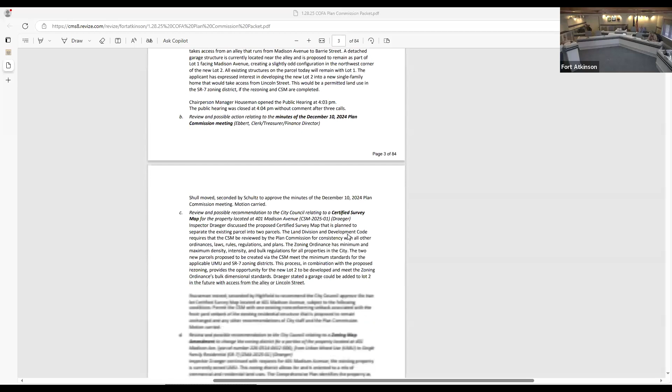Thank you. Yeah, this one's pretty straightforward. It's a new building sign on the front of the building on 1550 Madison Avenue. As you know, that also has the Subway and Pizza Hut in it. Riedl and Son moved in there for some office spaces, and this is an approval for a new building sign and a replacement sign for the front of the pylon sign replacement panel there.

I will apologize, down in the recommendation it did say monument sign. That is not part of this approval here. There's no monument sign, but it is meeting all the requirements for the city's ordinances. It is an internally lit LED sign.

Thank you for that, that's helpful to see. But like I said, it does meet all the ordinances for signs. It is internally lit LED lighting. As you can see on the building there, it's relatively similar in size to the other signs on the building, just a little different design to fit their logo. And once again, the panel replacement is fitting the same size as what's already existing in that pylon sign along Madison Avenue.

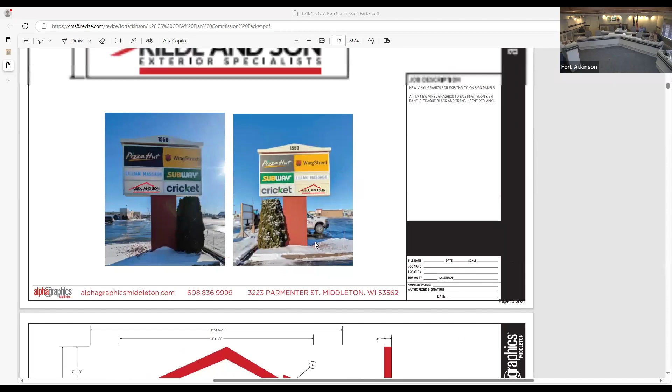City does recommend approval of the signage as it is proposed. I'll welcome any questions. Like I said, it's a pretty straightforward sign.

It meets all ordinances. Does the wall sign, is that internally lit? Yes. Okay, so that is lit, it's red and black, correct. That was going to be my question too. And then the panel sign, obviously that's internally lit, just like all the panels. Correct, yep. That'll just be the actual plastic piece over the top that's being replaced on both sides of that pylon sign.

Okay, any questions for Mr. Draeger from the Plan Commission? I will say it is nice to see this building getting filled. We've had a few approvals come through with this building, as well as the one on Lexington, on the corner of Lexington and Madison, getting filled up, which is nice to see. Yeah, it's great to see these spaces housing businesses here in Fort Atkinson.

So the staff recommendation is to approve the wall sign and what do we call that, a tenant panel sign? Correct. Yep, wall sign and tenant panel sign as proposed by the applicant. Is there a motion to that extent? I will move to approve. Second. Okay, we have a motion, a second. Any discussion by the Plan Commission?

You said they're just expanding, they needed some more office space. Yes, yeah, they did move their offices over there. They actually constructed 2 new offices and a portion of it, along with some existing offices inside, which they got all their building permits and everything necessary for that. I do believe they're retaining their site over on Oak Street as well, where they're also located. But so this will be an expansion, as far as I understand. Oh, I mean, good for them. It's great to see a local business being vibrant, healthy, expanding.

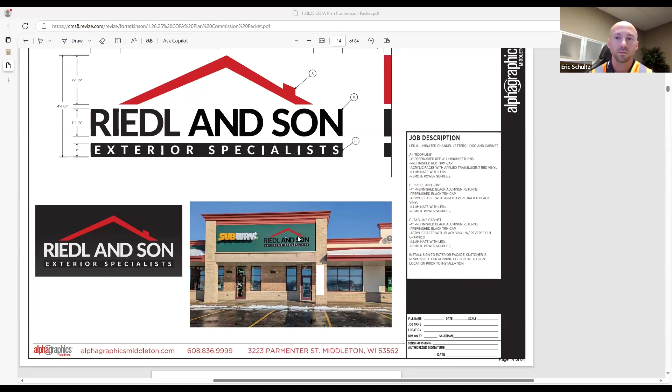Absolutely. Okay, we have a motion and a second on the floor to approve the 2 signs as submitted. All those in favor, please signify by saying aye. Aye. Any opposed? Okay, that motion carries 4-0. Thank you.

Next on the agenda, we have review and possible recommendation to the city council relating to the Ridge View Estates preliminary plat, formerly known as the Banker Road property. This is preliminary plat review 2025-01. Mr. Draeger.

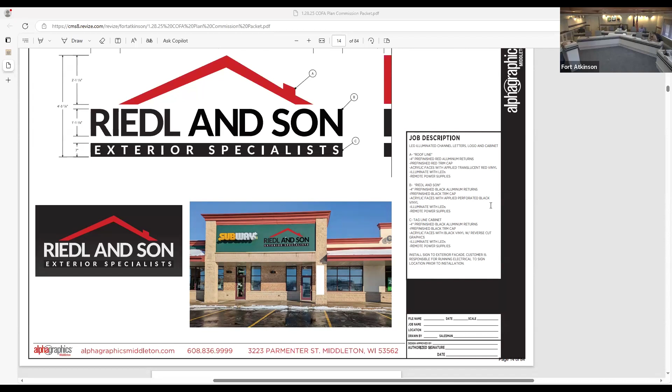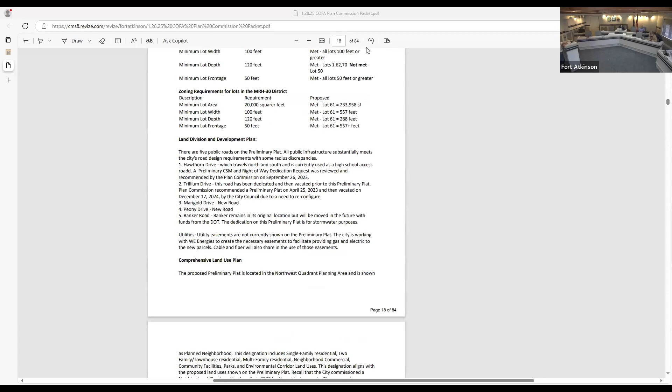Yes, this is a fairly exciting thing to bring forward here. Something I believe everybody involved has been working hard on, getting this to move along with Ridge View Estates up there on Banker Road, next to the high school.

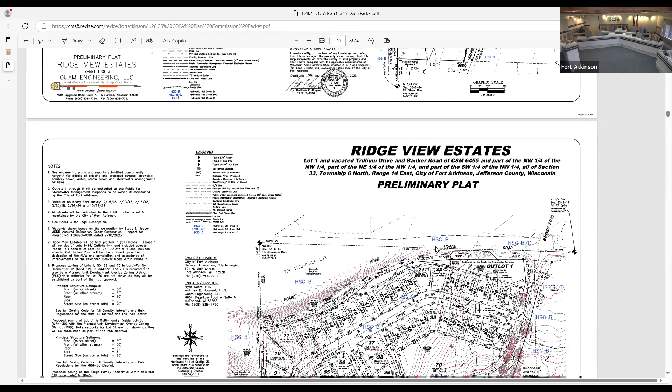As you can see here, there are several new roads currently under construction, as well as 71 single-family lots, as well as some MRM 12 lots, which would accommodate up to I believe 20 units per acre. Most of them are right around an acre, if not a little more, give or take, depending on where this one is located.

And then there's also an MRH 30 lot on the south side of Trillium. We've seen that road a few times in here, which is directly east of the high school. That is the L-shaped lot, which has an outlot to the southwest of it. That outlot is providing stormwater control and management for the bulk of the neighborhood to the north. There are several other outlots that would also be doing the same, helping control stormwater for the area.

One of the notes here is we do not see the utilities and easements for those yet. Those are still under negotiation with We Energies and design for some of the city-owned facilities, in regards to grading and things like that, which sometimes change depending on the quality of the soils we're running into. But the general layout is here.

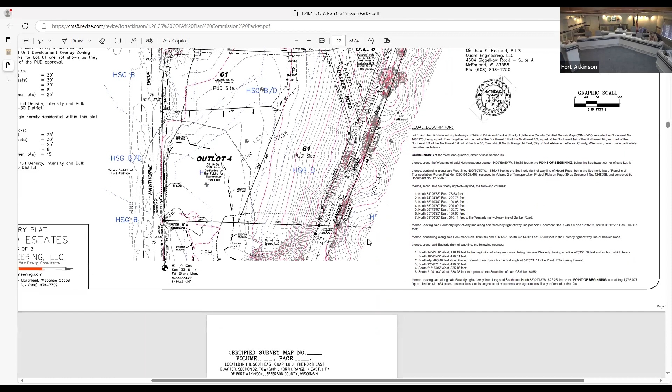That Banker Road, you'll see that kind of does that S pattern there, or Z. That is not necessarily the ending point, and they'll come before this Plan Commission again for the final road plans. That is put in there for stormwater easement and planning for this subdivision, which is why that's laid out in there.

As far as that goes, like I said, there is one lot in particular that does not meet our zoning ordinances. That would be lot 50, I believe, in regards to depth of the lot. So you'll see outlot 2 there, just to the north of it, that wraps around kind of parallel to Peony Drive.

Peony Place, there we go, third try. But anyway, parallel with that, I believe staff would recommend that we place easements for that outlot rather than have a separate outlot, so that we can put forward lots that meet our zoning ordinances as far as depth and pretty much all the general requirements for the particular zoning we'd be asking for.

Also, a note here is you'll see PUD listed on a few of those lots, whereas that's an approval that goes through Plan Commission, City Council, and several different aspects regarding the general development plan and a specific implementation plan. Those would have to come forward through the city approvals process before they could be labeled that.

They should be labeled as their underlying zoning, which is a requirement for the PUD process, that you start with an underlying zoning and the PUD is a variation from that. So that would be another recommendation, that those get corrected. Other than that, everything here is for the most part meeting the city's requirements.

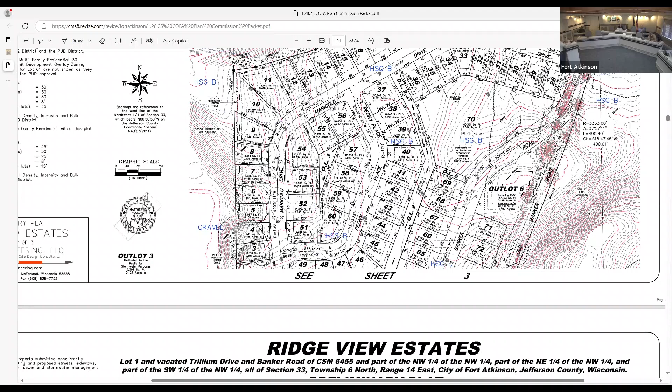Public rights of way are meeting the land development ordinance as well, required easements and those. So other than a few recommendations which we have there, which I'll list off here, so we all know what we came up with through review.

So city staff would recommend the Plan Commission recommend to the City Council approve the preliminary plat with the conditions that I will state here. The PUD lots should be labeled with the individual lot's base zoning. Outlot 2 should be eliminated and replaced with stormwater easements, bringing all proposed lots into conformity with respect to dimensions. Outlot 3 should be eliminated to accommodate changes in road grading per the design engineer.

Utility easements to be shown on the final plat. Set all collector street radiuses to city standards. Outlots should be described and labeled as conservancy on the final plat.

And that would be along the same lines as the PUD comment I made, that should be labeled appropriately for our zoning. And then the comment made there about the radiuses, there are a couple road radiuses that do not quite meet our requirements, and so those should be adjusted to meet the city's ordinances. But other than that, I'd welcome any questions or comments on this.

Jed, can you talk a little bit about, so we're looking at this preliminary plat now, your staff is asking the Plan Commission to approve it, subject to the conditions you just outlined. But we're going to see some of these lots again before this preliminary plat is approved, through a certified survey map process.

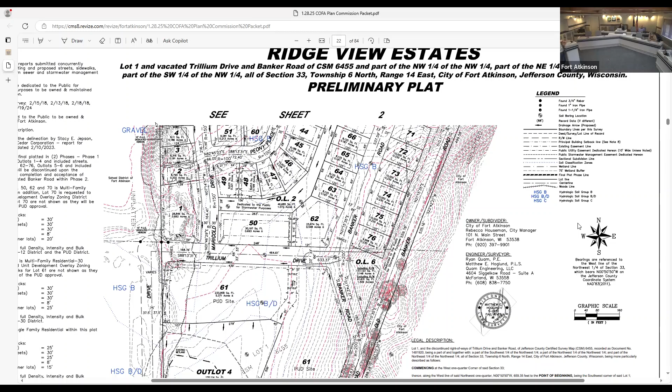What's nice about this is it allows the process with the preliminary plat to be reviewed a few different times to make sure we're getting it right. The CSMs do allow us to move some approvals forward, but they're more of a microscope, allowing the designers and everybody to get the rest of the preliminary plat set the way it should be.

Can you tell us about outlot 6? Yes, outlot 6 is more stormwater retention. That wraps around behind those lots along Banker Road, or the proposed future Banker Road, on the east side. It does connect all the way to the south if you move down to the lower part of the map.

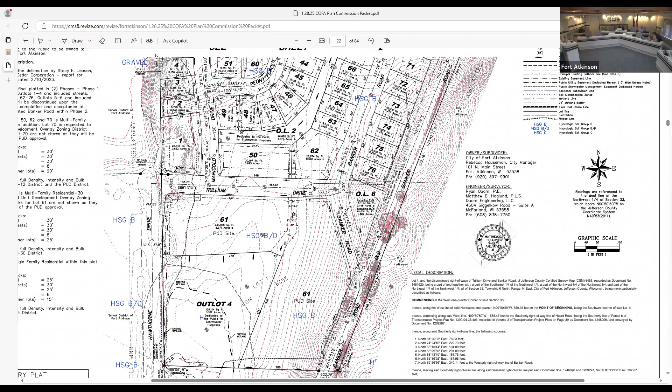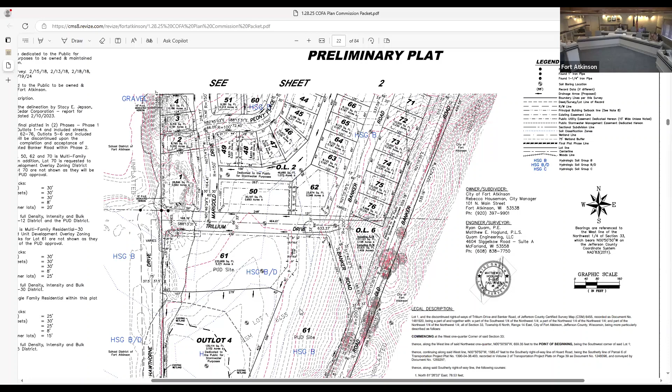Jed, just so I'm clear, you said 71 single-family lots, and then there are lot 61 and lot 70? So 61 is the only one that has that high density multifamily. We don't know at this point how many units they're going to try to put there? That's later on the agenda, we do have that. We have a couple concept plans coming forward, one for this one and one for an additional lot. And lots 50, 62, and 70 are also multifamily? Yes, those are the underlying MR-12, so it's a higher density than single family but not as dense as the MR-30. We'll see the product in the concept plan for what they're proposing for lot 61.

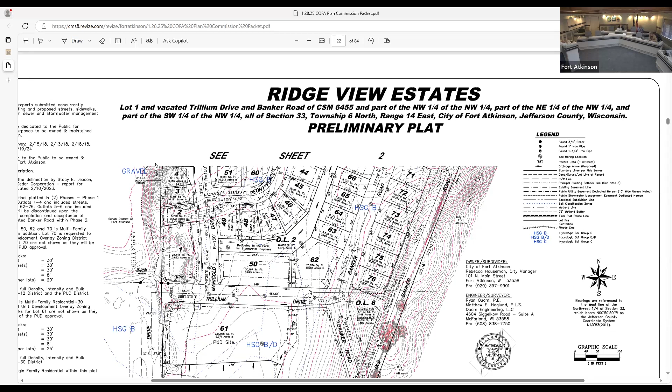Questions for Mr. Draeger from the Plan Commission? Yes, I have one question. I was just curious, you mentioned the radius of the collector streets. Did you touch on that? Is it too shallow or too steep, and where are the issues on the map?

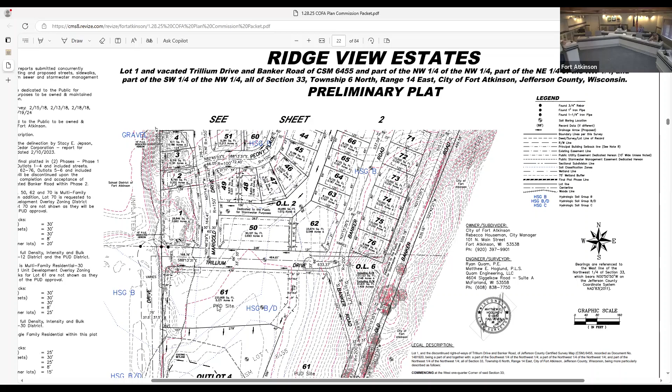I believe the radius is too tight. It's the relocation of Banker Road there, those two curves, and I believe they're too tight. It's a collector and the DOT is now engaged heavily because of their grant, which we're very appreciative to have, but it changes the standards for the road, so we'll have to accommodate Banker Road. Let me see if I can find it, I believe it's this section, and also where it redirects back onto the original, and this section. I believe those are the two.

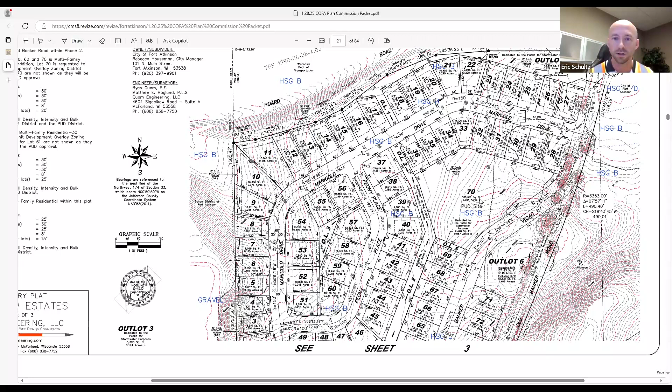Just out of curiosity and learning on my part, I would assume collector streets can sometimes have higher speed limits, and that's why they'd want a more gradual radius, or is that the thought behind it? I can't speak for the DOT, but I don't think it will be more than 25 miles an hour on Banker Road. It's going to be an urban cross section with a 66-foot right of way, as you can see on this map, and there will be sidewalk, which actually isn't shown on the plat, which probably should be, and bike lanes or whatever ends up becoming part of that road. I would not anticipate it being a high-speed collector, just a collector for the side roads in this neighborhood.

I believe the standards may have to do with the possibility of higher speeds, but I don't believe that's something the city would be looking at for there, or it could be about the volume of traffic coming through as it being a collector. All right, thank you.

Questions from other Plan Commission members? Sorry, you just made a comment on sidewalk, is that something we're going to make a note of within one of the actions at the meeting tonight, so we didn't overlook it? I think we need to look at our subdivision code to see if that's required to be on the plat, but because the Plan Commission will be looking at this plat a couple more times, I feel comfortable not adding that as a condition at this time. That should be included in that public right of way width as part of that width.

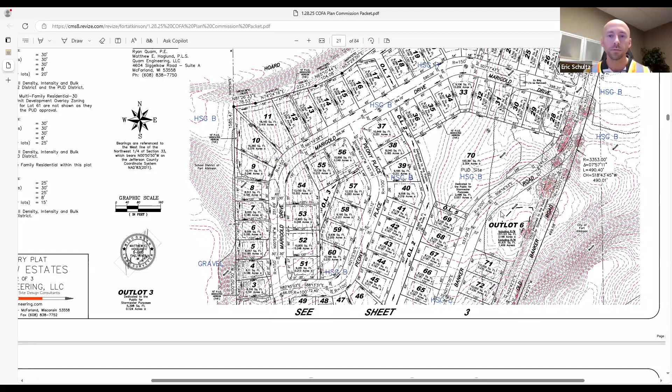Yeah, just one other comment. The SR5 zoning, which is primarily what the single family is proposed to be zoned, is one of our higher density zonings as well. It's not great expansive lots, it's more consolidated. And the zoning for lot 61, is that the high density? Will that allow for mixed use? No, this is just residential.

Okay, we do have a motion and a second on the floor. I would call the question. All those in favor, please signify by saying aye. Aye. Aye. Aye. Any opposed? Okay, that motion carries. Thank you.

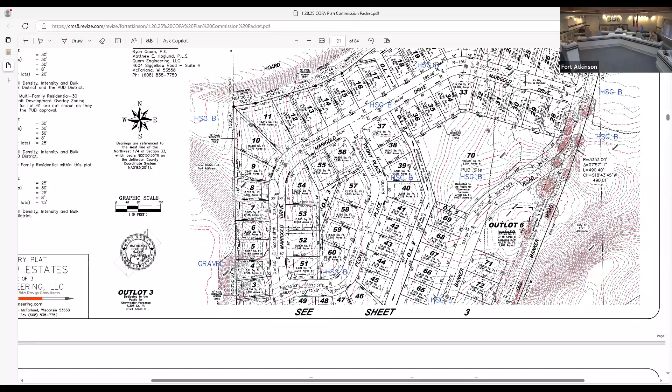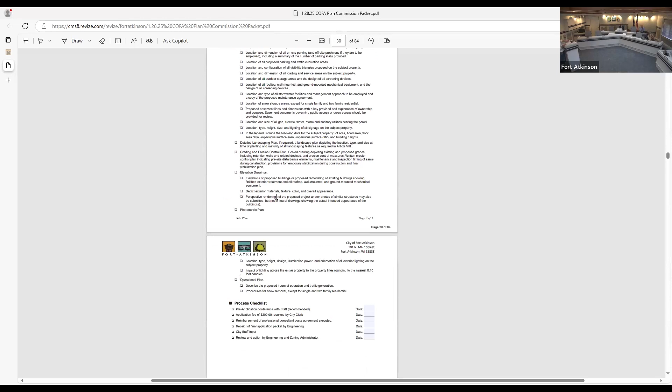Okay, the next item on the agenda is a concept plan for a planned unit development, general development plan, and specific implementation plan for Ridge View Estates, Lot 61, PUD 2025-01. Mr. Draeger. Yes, thank you. So as we said, some of these would be coming forward here for you to take a look at. As this is a concept plan, there is no action on this. This is more or less just showing what is potentially coming forward, and what their thoughts are on it. I believe we're starting with lot 61 here, which is the multifamily MRH 30 lot. If we could scroll down to the site plan, please, a little bit further.

It's not cooperating, is it? No, it is not cooperating with me, but I will persevere.

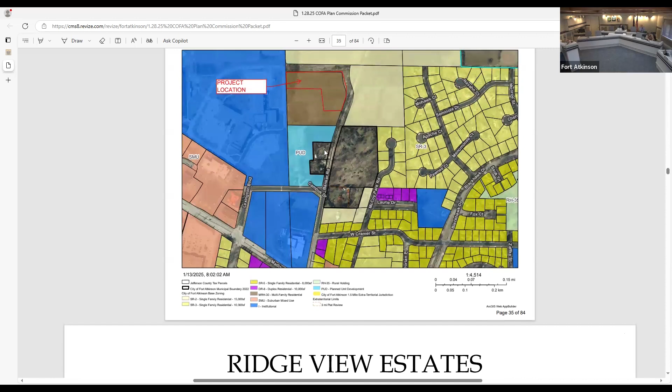So anyway, this is that larger size L-shaped lot, as you can see there, which is directly east of the high school, east of the new Hawthorne Drive, south of Trillium. This would be a multifamily residential, and as you'll see in some of the notes there on the plans, this one is slated for 87 units.

There is a phase 2, but we do not have plans for that. That's potential in the future phase. What's coming forward is this first building, which is 87 units with underground parking, 3 stories.

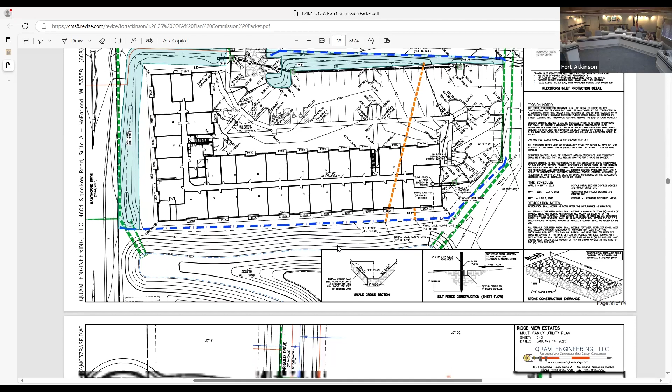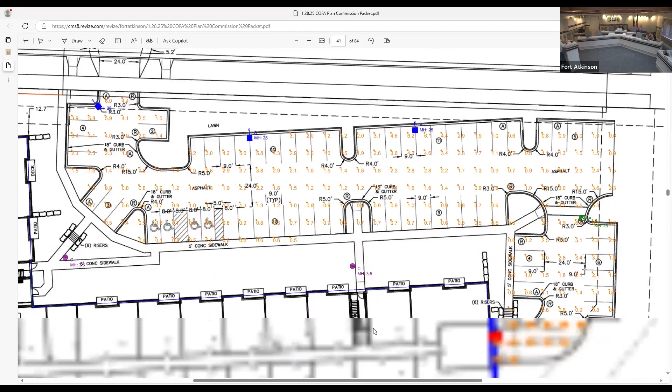There's a variety of size apartments in this. This would be majority two bedroom, as far as I understand. We do not have the exact final building plans for this, so those would still go through state review for the building plans. Where we're looking at is more or less the site, landscaping, parking, lighting, and of course, all those aspects of the site on this.

The reason this would be a PUD proposal is there are some restraints in regards to the site and the size of building they're trying to fit there, as well as the parking, some setbacks that are not being met. That's also because of some site restraints due to stormwater easements coming through there for the subdivision to the north.

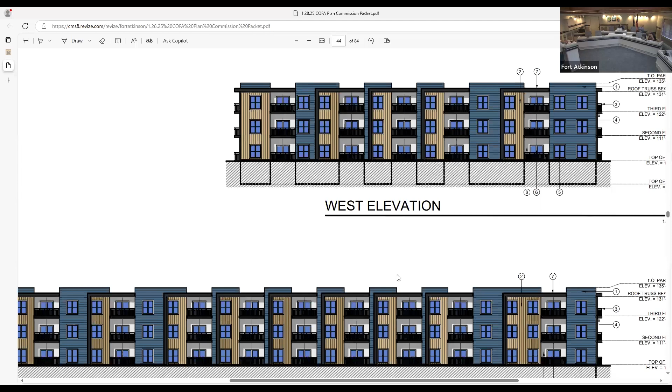But as you can see in this picture here, this is a 3-story building with the underground parking, and then there is also surface parking. So what's nice about this is there would not be any of the row garages on this site. This would all be, like I said, some surface parking, but also each unit would have their own individual space in that lower underground parking.

This would bring some much needed housing to the city of Fort Atkinson for sure. There are some, as I said, there's a landscaping plan. They're not quite, as far as I can see on their numbers, meeting what our ordinance says, but I believe in the intent of our zoning, they are meeting it.

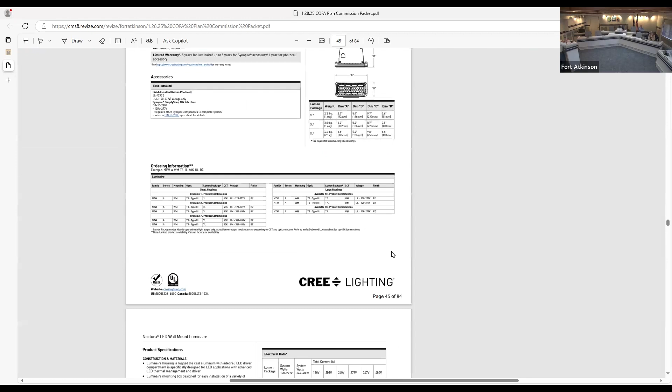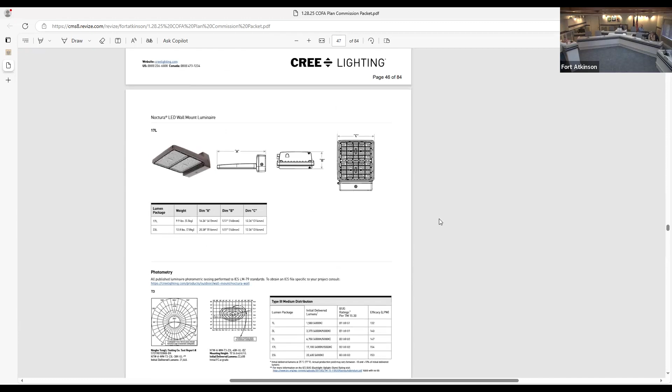It's based off a gross floor plan, but when you hit 3 stories, you're asking for a lot of landscaping on a lot that may not allow for that much landscaping, which I believe we tallied it would be around 80 some trees in order to get anywhere near the number, which, as you'll see in their landscaping plan, is they're providing for a substantial amount of landscaping. But there are some aspects of our ordinance that they are not meeting.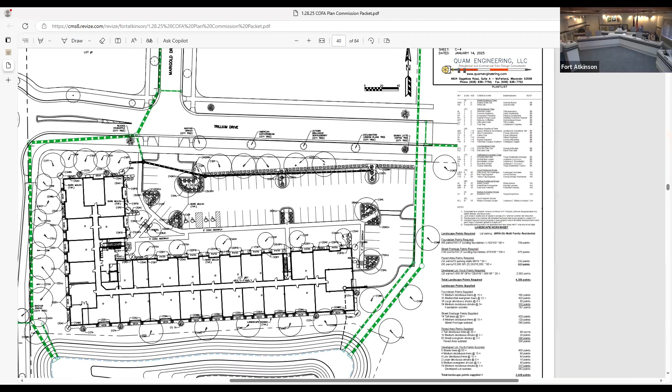But as I said, part of this PUD process would be working with them to work on those areas. One of those would be there's an easement with some parking, that stormwater easement all the way to the east there, which we would be looking to make some changes there if possible. But that's one thing about the PUD is you're starting with that base zoning, and then the process generally is the applicant and the city working together to find the best course forward. And that may give and take a little bit to get the best product out there that we can.

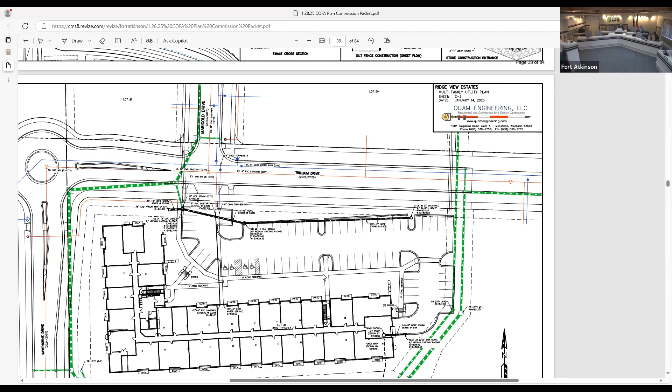So as I said, I will take some questions here. It's pretty well laid out. It's kind of up in the air, some of this stuff. There's still room to work on and things to discuss with the developer on it. But this is more or less to gauge the response from this planning commission on thoughts of what you think about it and things along those lines.

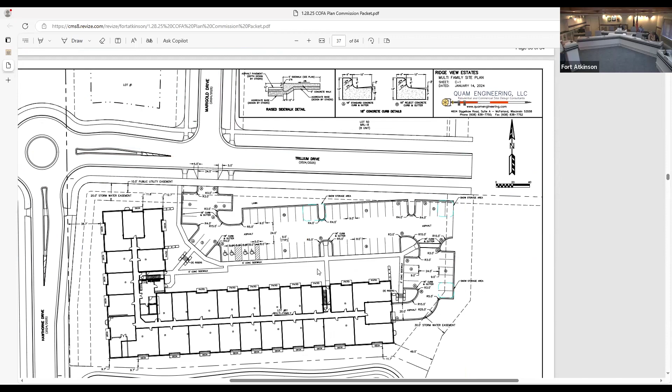So 3 stories of living space and parking on the lower level, below ground, yep. And this is all walk up, or will there be elevators? No, this is elevator, yes.

I'll pull up the floor plans. Yeah, I believe they have on-site community facilities as well. Correct me if I'm wrong here, but I believe they have a gym planned, and then they also have a community area. Also part of this developer's plan is to give each space in the basement a storage area in front of their parking stall as well. So they really have thought of quite a bit of functionality and comfort for the tenants of this building. I believe they put some thought into this.

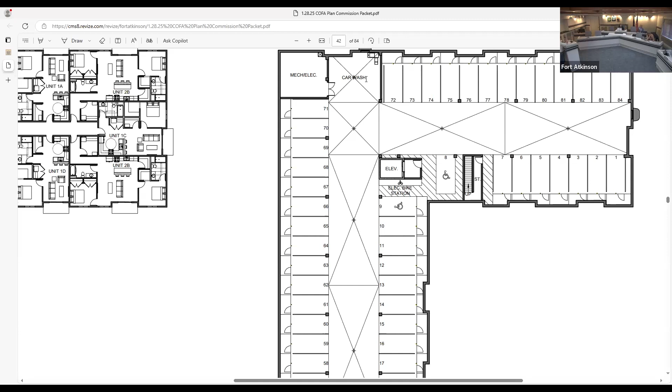So there's a car wash area here, and then parking spaces, and then there's storage for each unit behind the parking. Here's the elevator, stairs. This would be the ground floor, dumpster. And then just moving over this way.

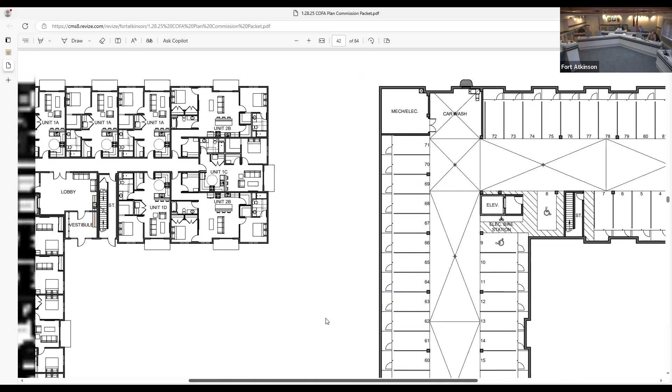So yeah, while we're looking at this, what I will point out is that PUD is its own zoning district. So that's the reason for on that preliminary plat where we would have that base zoning shown there. And then this would essentially go through a zoning map amendment to make it a planned unit development district.

So first, I'd like to note we have Adam from American Construction on the line. Adam is part of the development team. Adam, is there anything that we missed that you'd like to add relating to this first concept look at the building and site plan?

Sure, thank you. Good afternoon. I know you did a really good job explaining it. I just thought I'd pop on to confirm that yes, there will be some amenity spaces. We're looking at a possible dog run, maybe some grilling space, as well as a gazebo sitting area. That's all outside the building.

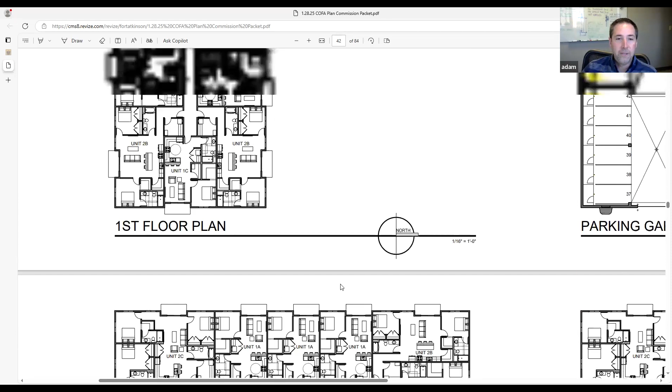As far as inside the building, you're correct, there's a community space that's open to all the residents. There will be office space on the second floor, so if they work from home, they have the ability to use a private workstation area.

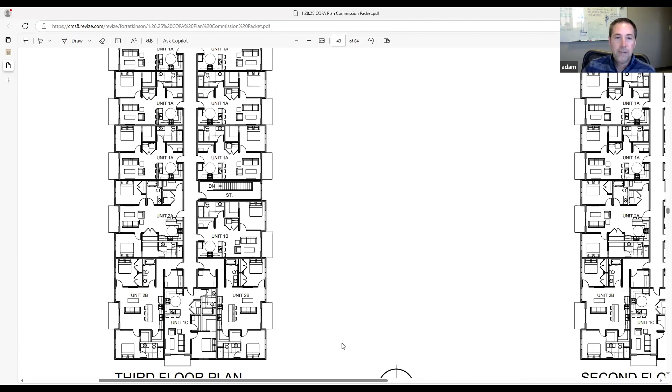Just to the left of that is where the little workstation area is, so you could have a little conference room area if you needed it. Then on the third floor there's a fitness center. So we're looking to provide as many amenities as possible, making it a really desirable location for folks looking for apartment lifestyle.

Adam, do you have the unit counts readily available to share with us? So you are correct, it is 87 units. It's a mix - I believe 6 studios, and then a mix of 1 and 2 bedrooms after that, with the majority being 1 bedroom. I'd estimate maybe a 70-30 split, maybe 60-40 split roughly, between 1 bedroom and 2 bedroom, after you take out the studio units.

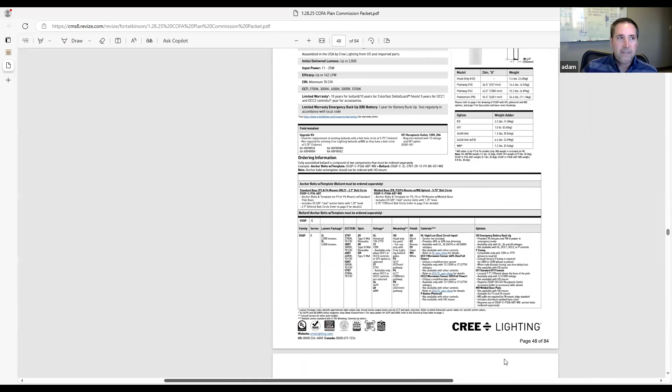So you're probably looking at 51 one-bedrooms, 22 two-bedrooms, something like that off the top of my head. They range in square footage - the studio is maybe 550 to 600 square feet, the 1 bedrooms being 750 to 800 square feet, and the 2 bedrooms in that 1100 square foot range.

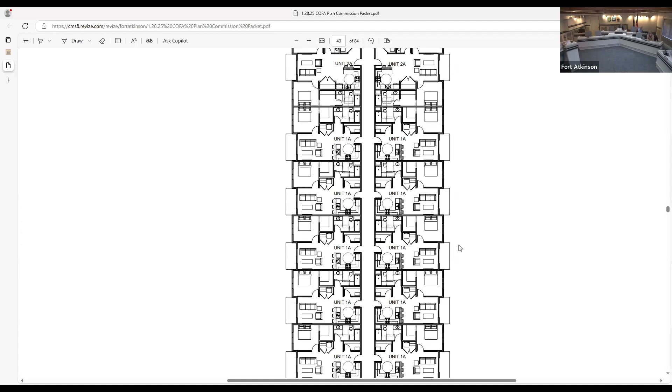Forgive my awkward mouse scrolling here. I'm away from the computer that the mouse is controlling and it's not cooperating very well. But thank you for that.

At this time, I'd like to open it up to the Plan Commission for questions for Mr. Drager or our developer Adam, who is on the line. So if there are questions, please go ahead from the Plan Commission.

Hi Adam, my name is Jill Kesnick, I'm a plan commissioner. This looks like a really exciting development. One question I thought of - knowing this is a pretty rural area currently and not within easy walking distance of much at this point, have you ever considered putting anything like a cafe or convenience store in these facilities?

We haven't, and I'll defer a bit to the city on that. I don't know if it would be allowed based on the zoning, but at this point we have not. You're right, there are a lot of these types of buildings going up with first floor retail and things like that, but that often brings other questions to figure out - for example, if you have a retail store, you start to increase parking requirements and things like that. So I might defer to Rebecca or Jed, but to answer your question directly, we haven't, because of some of the other restrictions that go along with that in terms of site planning and zoning.

Yeah, he is correct, the zoning would not allow for that. And he's right that a different mixed-use zoning would bring on additional parking and things. The hope here is that with the additional residential units, we can have that other stuff show up and start building nearby.

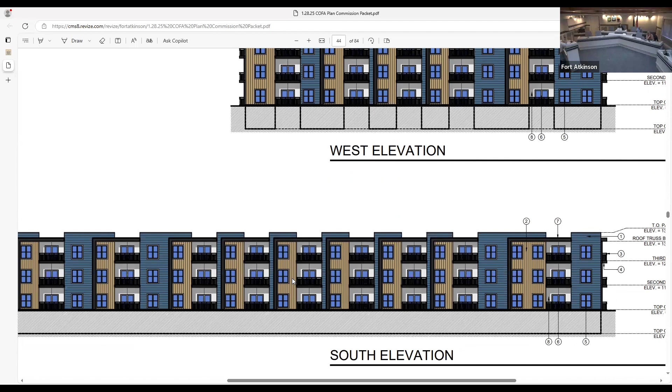And the assumption is that this meets the zoning, like we don't have anything stopping how big a building is, correct? This meets the zoning as intended? Yeah, we do have restrictions regarding height and impervious surfaces on the lot, and this one is meeting those, as well as the height. At one point it might not have met it. I believe we did a zoning amendment to this a couple of years ago regarding height for 3-story buildings, to accommodate what I believe the city was looking for, to maximize density and underground parking, to try to get away from front-loaded row garages on the outside that eat up real estate.

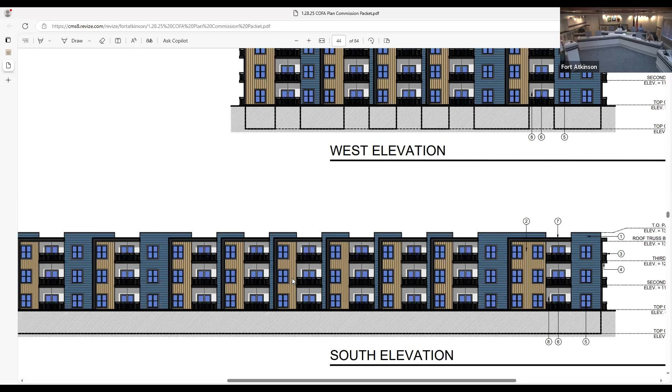Okay, no, thank you. Go ahead, just overall I'm excited, very hopeful to see this in real life as soon as possible. Our city needs to provide a little bit more breathing room for those looking for housing, or as mentioned earlier, just options for different types of housing. Other council members have mentioned that we haven't built an apartment complex or multi-unit of anything substantial in over 20 years, so definitely very excited to see this move along.

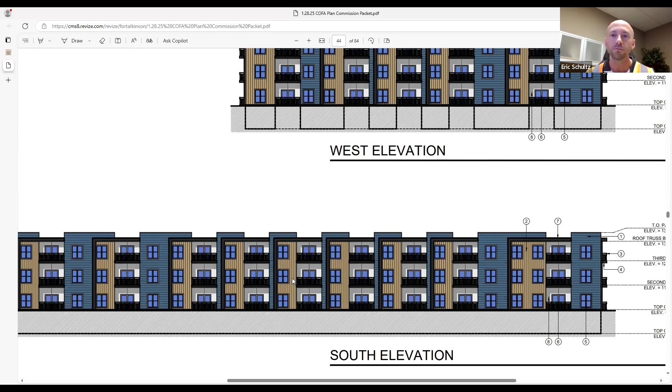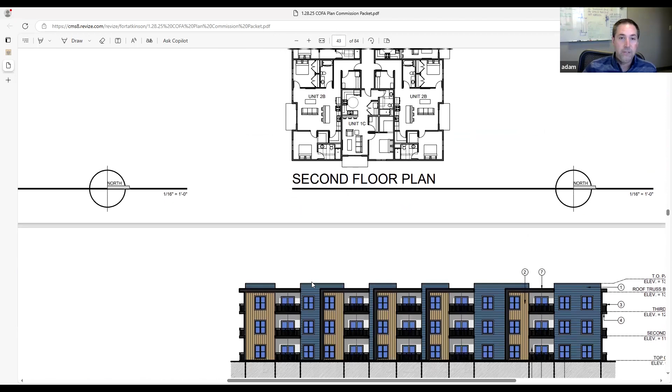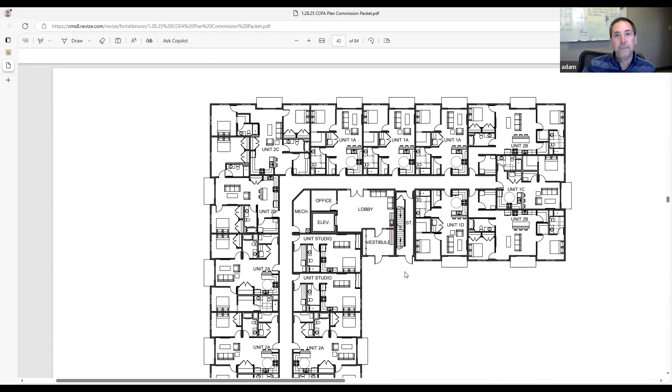I have a question - what are the plans for mail and packages? On the first floor, in the lobby space, there is a mail slot for each one of the units, and there's also a parcel table. So the front doors are unlocked, then there's a second set of doors that are locked, so the post office has the ability to get into that lobby area. In the vestibule, on the left-hand side there will be a wall of mailboxes for each resident, and on the right-hand side is the parcel drop-off, so UPS leaves their packages there and residents get a notice in their mailbox so they can retrieve them.

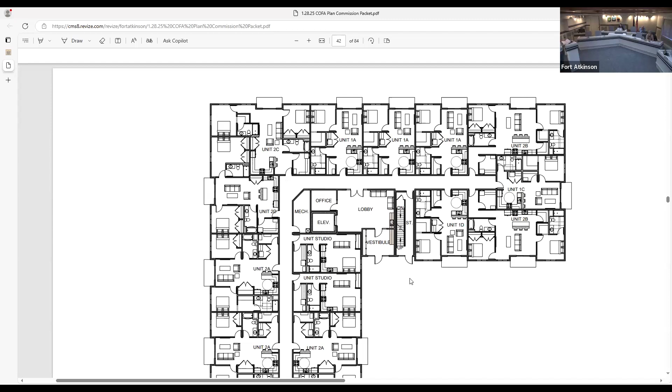Okay, if there are no other questions, there's no action required by the Plan Commission for this item - it's simply the concept plan. At our next meeting, Mr. Drager, could you have that outline you've made of the schedule so the Plan Commission understands what the schedule is for these planned unit developments? That would be great, and then we can all know where we're going next.

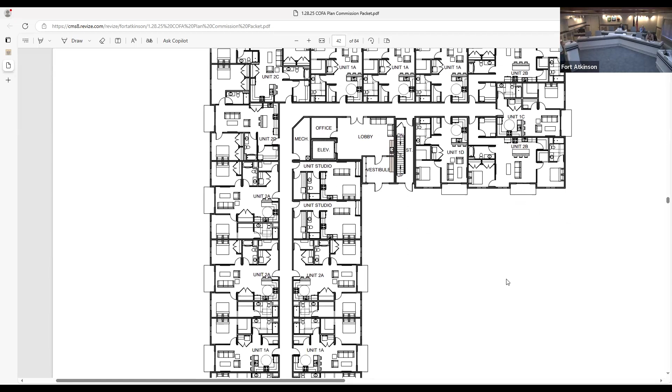Where we're going next on the agenda is the concept plan for the planned unit development, group development plan, and specific implementation plan for Ridgeview Estates Lot 1, PUD 2025-02. Just a note from what we were talking about a little bit ago, as far as the certified survey maps, those lot numbers will change, so don't put too much credence in these PUD Lot 1 and PUD Lot 61 numbers, because those will change into the future.

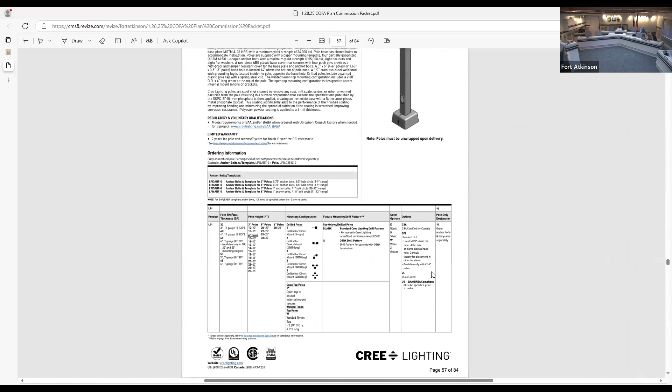Jed, why don't you go ahead while I find the item here in the packet. So this next concept plan here is for that lot 1 as we saw it, but as we know, these lot numbers will change in the future. For right now we'll refer to it as lot 1. It's on the northwest side of Trillium Drive and Marigold, on the left side of that, as you can see up there in the top left corner.

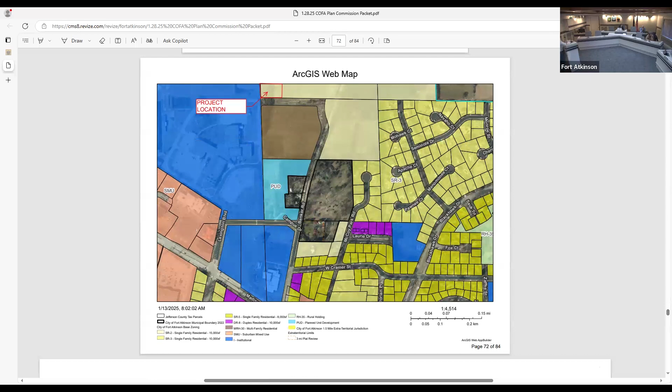Currently it's zoned single family, which was a designation put for the whole area, just kind of a blanket zoning to hold the spot. This would have an underlying zoning of MRM 12, which is our medium density multifamily zoning.

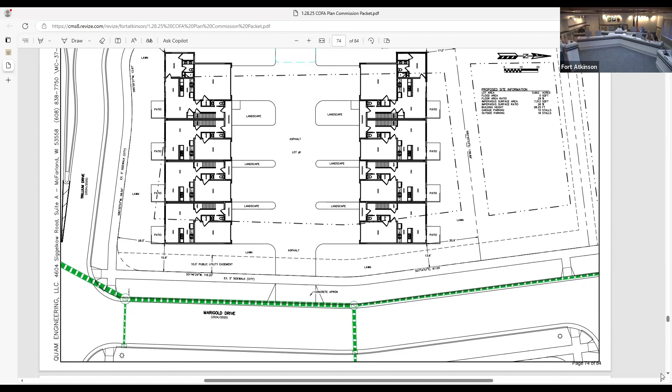As you can see, this is two banks of row housing or townhomes. They are attached to each other, but each is an individual living unit. They are proposed to have their own garage space and additional parking outside.

Landscaping improvements go through the same approval process as some of the larger projects. It's just a little bit smaller in scale. This would have 8 total units.

Once again, this is a nice product, I think, for a transition from that higher density to the single family. It kind of softens it as it goes to the north, and like I said, it has each individual owned units there.

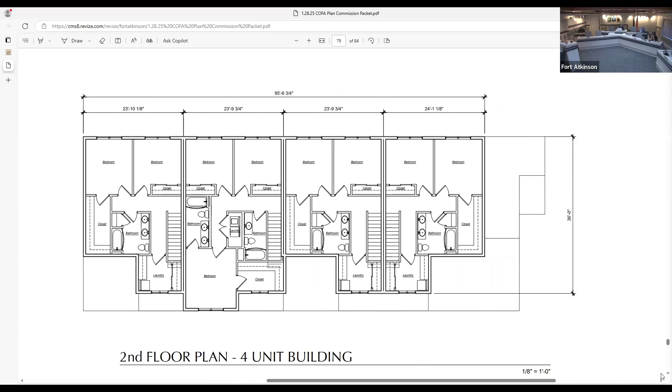So this is as far as the plan as of this time, these would be individual parcels and not rented space. It could go through a condo plat if they chose to go that route, which would be another review, as would the individual parceling of this, which I believe is the plan.

You can see the individual garage doors, parking outside. These essentially are an individual home. They just share a wall, much the same as a duplex does, except there's 4 of them in a row rather than just the 2.

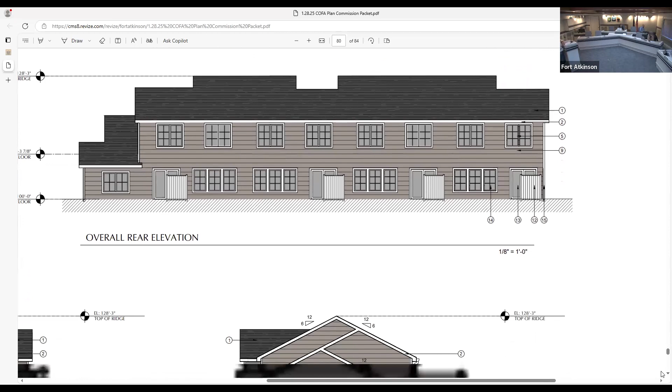This, once again, has some variances from our zoning ordinance regarding some setbacks to the lot lines. I believe what they're trying to do is maximize the units on the space, and there are some restrictions with this lot regarding grading and things in this area.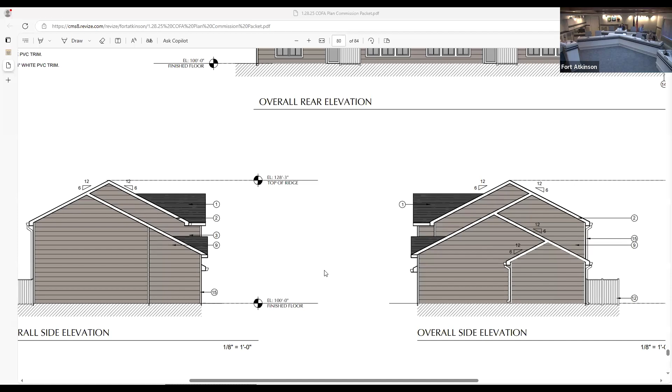This area had some elevation restraints in these lots, lot 1, 2, 3, and 4, as you saw on the preliminary plat earlier. So this is moving it forward to kind of move away from that, which I think was part of the issue there.

So once again, that PUD process allows us to work with the applicant to potentially encroach that setback a little bit, but maybe we ask for different design elements or some extra landscaping or things like that to offset that and make sure it's the best project for both parties, the city and the applicant. So with that, I'll take some more questions you may have on this.

But as you can see, the same thing as the previous plans, it's pretty straightforward as far as single family units, and it would be a nice and welcomed addition to our city. As you can see, it's designed nicely, it has some articulation, and there are some nicely designed buildings from the front side view.

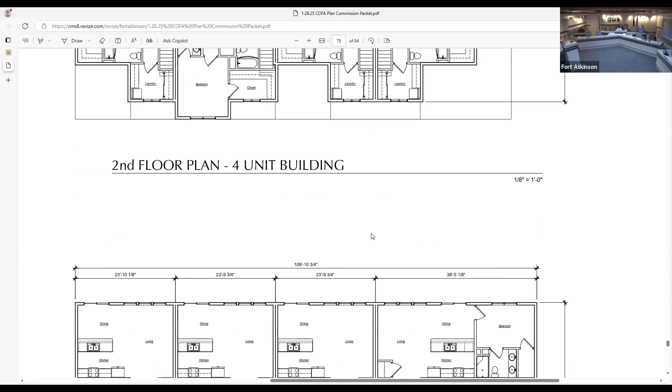Yeah, I really like that overall front elevation. I'll just note a couple things. Because of the way this is on the site, and I will do my best to scroll back up to that site plan, but the back elevation, let's see.

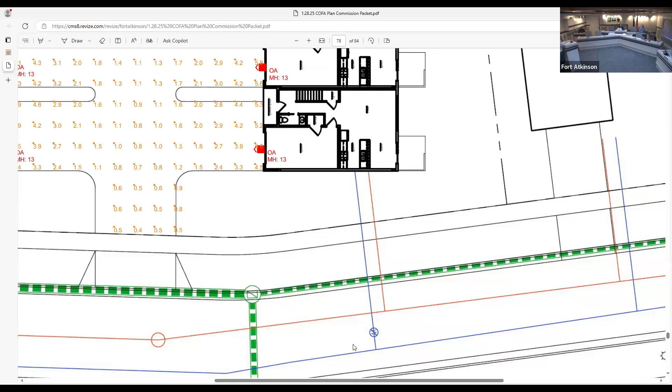So the back elevation is facing a right of way here, and then these two side elevations are also facing right of ways. When we went down and saw those elevations, I think they could use a little bit more articulation.

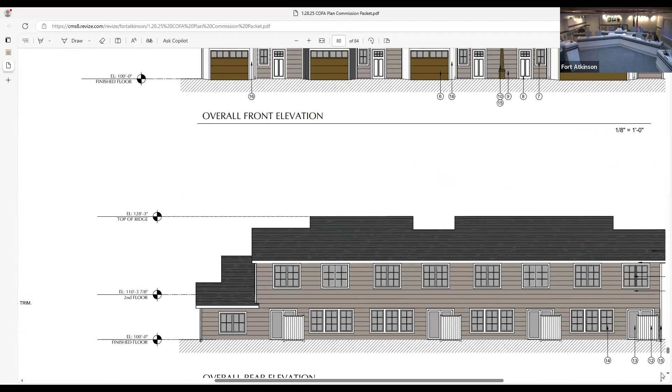Really trying to be efficient with this mouse, but it's fighting with me. So this is one of the rear elevations, and that would be facing Trillium Drive, and not very far from it, 15, 18 feet from the right of way line. It is fairly close, and this would be an entrance right into the new subdivision there.

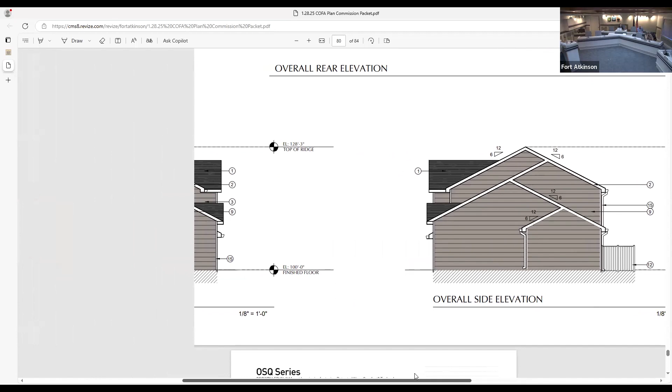Yeah, it'd be nice to have some likewise stuff with these overall side elevations. We would have one of each of those facing Marigold.

You know, Adam, I don't have any feedback as far as exactly what I would want to see there. I think that your architects and your folks who design these buildings could come up with something a little bit more aesthetically pleasing on those two sides, basically two sides of one building and one side of the other building that are facing the public rights of way.

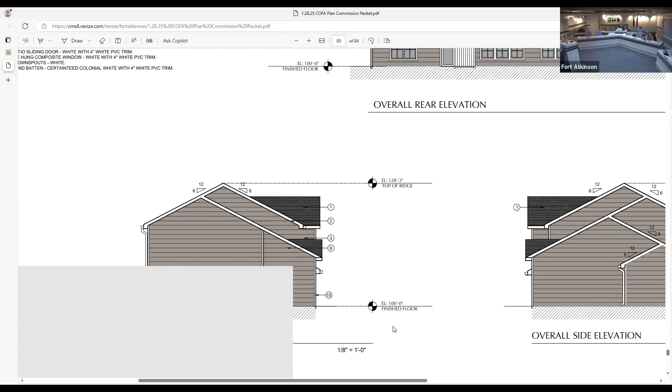Sure, okay. Yeah, I mean, I like the color combinations that you're using, and I think even if we can't do additional gables or things of that nature, at least you could use that color palette in a way that differentiates a unit from another unit, or provides some contrast or some additional aesthetics along those rights of way.

Different siding types, maybe. I don't know if there's a space for additional fenestration on those two end units. That would certainly break up that massing too. Yeah, for sure, okay, thank you, yep.

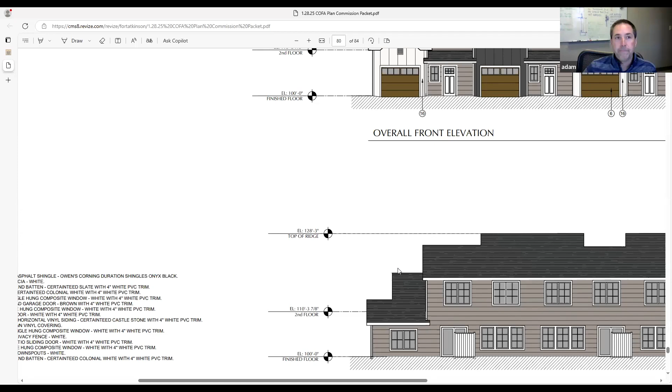Questions on this concept plan from the Plan Commission?

I just want to reiterate what Rebecca said. I think that the front elevation is really attractive and eye-catching.

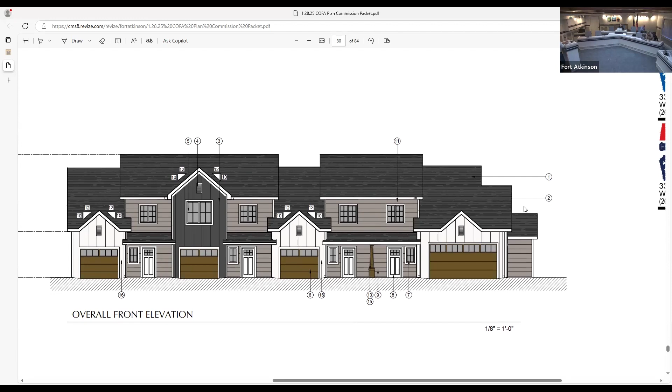So I'm going to attempt to go back up to the site plan so we can look at that again. And Jed, maybe you can just remind us exactly which elements are requiring the PUD designation versus straight zoning.

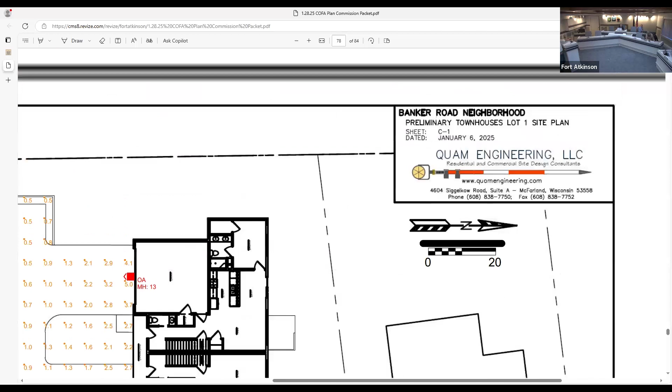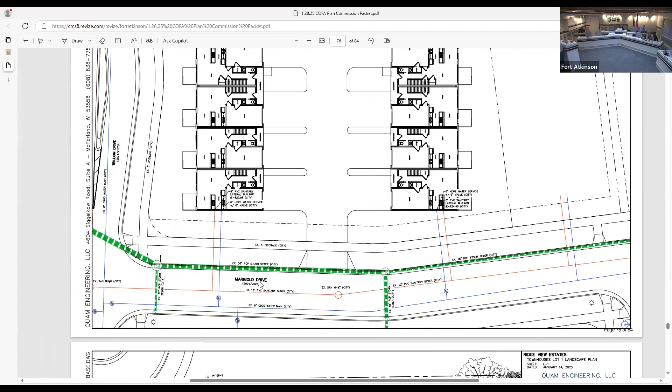So that would be our setbacks from the public right of way. They are encroaching, especially along that marigold there, which would be what I guess we'd look at as the front of the lot. I believe they have 13 feet at the lowest number. And at the moment, I'm struggling with the amount we need - I know it's 25 feet, I think, is what we asked for from this MRM 12. So they would be encroaching that.

From a building setback standpoint, the zoning does allow for the density. I did have conversation with them on the impervious surfaces, buildings, and the driveway and all that, and I believe they are just making it on that. They're running those calculations again, but once again, those would be looked at. Overall, there are very few aspects of this where they're not meeting requirements.

It'd also be the two principal structures that would be the bulk of the reason for the PUD. All of our zoning ordinances or all zoning districts require a principal structure, and then accessory structures after that. Here we have two principal structures, which this is the appropriate process to accommodate.

Okay, anything that we missed, Adam, that you would like to add about this proposed planned unit development? No, not at this time. If there's any questions, I'd be happy to answer them. But no, I think you did a good job describing them.

Are these 2-bedroom, 2 and 3, or bedroom? Sure, great question. So for a 4-unit, let's say the one on the left, it has 2 bedrooms and 2 3-bedrooms. The 3-bedrooms, there's one option where it has all 3 bedrooms on the second floor. And then the top one that has the 2-car garage actually has 2 bedrooms upstairs and 1 bedroom downstairs for a 3-bedroom, just to give that variety in case there's a mother-in-law suite or something, you don't want to have to go up and down the stairs. So there is that option.

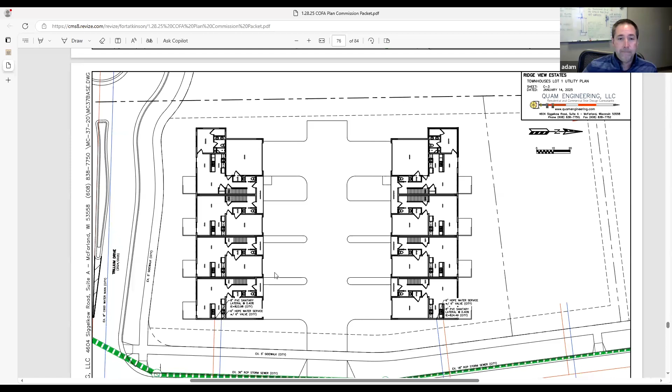And it'd be similar to the apartment complex as well, right? It's probably the same company that does the snow removal and the landscaping and cutting that would do these as well. Yeah.

Yeah, I've seen this style, like condominium style housing built in Lake Mills, and they filled up and they look beautiful. You know, if I didn't already own a house, I would look at those next.

Any other questions or comments from the Plan Commission? Okay, again, this is not an action item, and we will definitely see it again. So thank you, Adam, for your time.

Absolutely. Thank you. The next item on the agenda is an update on previous Plan Commission items. Mr. Drager and/or I would be happy to answer any questions about specific items that anybody needs an update on.

I don't have anything specific, but I will just note we have a couple deadlines from things coming up. The old Shopko, which is now CubeSmart, had a couple outlots that they were supposed to either sell or remove the pavement and return to green space. That is coming up, I believe, in 2025.